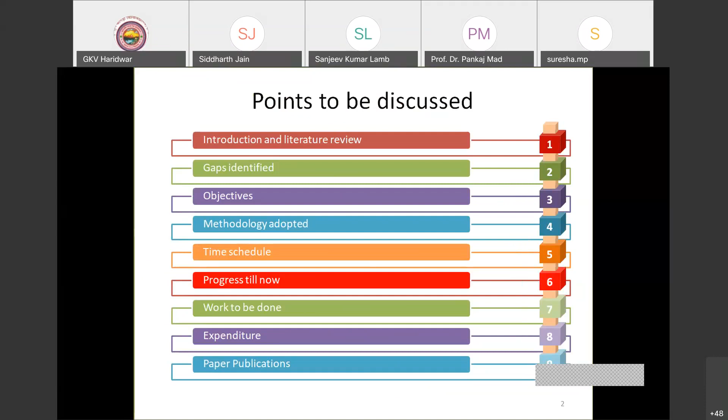So in the few coming slides, I am going to discuss the following points: the introduction, what are the gaps which we identified, objectives, methodology, time schedule of the project, along with the publication details. So I'm just going to discuss why we need alternate fuel, how transport fuel has been changing.

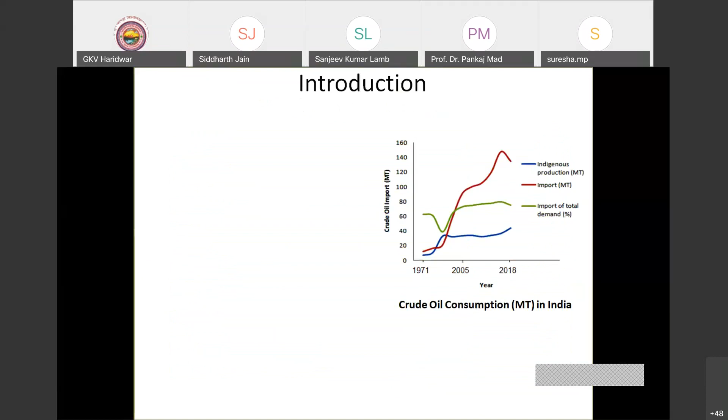So you can see in this slide that India's share of crude oil production is about 1% of the total world crude oil production. However, the consumption share is about 3.1%. So the figure is showing that we are consuming 3 times more than what we are producing. And the result of that is that we are importing almost around 80% of the crude oil from overseas.

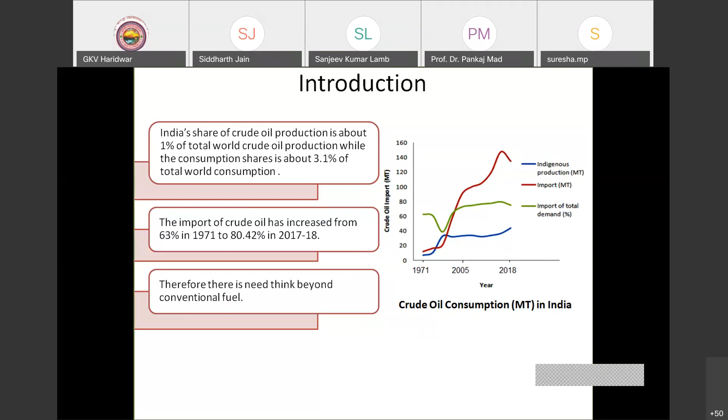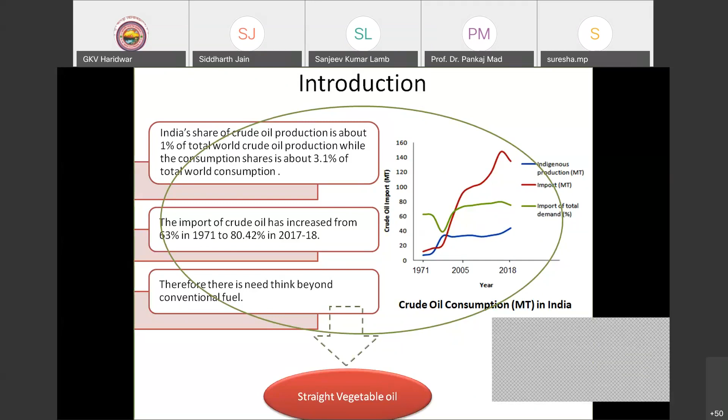So that is why we are spending a lot of money in foreign exchange, as Dr. Pankaj Madan has already discussed. That is the main reason we are moving from conventional transportation fuel to non-conventional transportation fuels, and this is the basis of the need. So for that, we need alternate fuel, and a big portion goes to straight vegetable oil. If we want to produce biodiesel, then straight vegetable oil plays an important role.

Now, before going much into the technical portion, I'm going to discuss what is fuel, and why we are talking so much about fuel, transportation fuel, conventional and non-conventional. So, fuel is any material that can be made to react with other substances so that it releases chemical or nuclear energy as heat, which can further be used.

So basically, the fuel is combined with oxygen. Of course, for burning of fuel, for combustion, we need oxygen. So fuel is combined with oxygen, and in the presence of some initiating heat, it produces a combustion process, and the result is the production of heat as well as exhaust. A part of that heat could be used to continue that combustion process. And the big portion of that heat is used for producing work, for any kind of energy, either mechanical, electrical, any kind of energy.

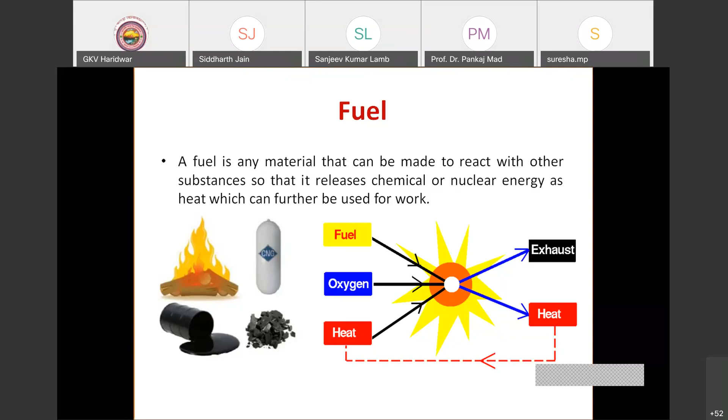So now the classification of fuel. In a major manner, the energy resources are divided into two major parts: the primary energy resources and the secondary energy resources. The primary energy resources are the resources which are naturally available on Earth. These are not man-made. However, the secondary energy resources are synthetic energy resources. These could be derived from primary energy resources, like producer gas or the oil.

So these are not available by themselves on Earth; we have to extract these from the primary energy resources like the coal. Producer gas, of course, is the combination of carbon monoxide and hydrogen, and the oil is produced from the crude oil. So the crude oil, that is the primary energy resource. Now the primary energy resources are divided into two parts: one is the non-renewable energy resources and another is the renewable energy resources.

Of course we know that the non-renewable energy resources are not replenishable in nature. These are not produced by themselves, or they may take millions of years for producing, like the coal, the petroleum, the natural gases. However, the renewable energy resources are replenishable in nature. These are produced by themselves and are abundant on the earth, like wind, geothermal, biomass, solar energy. There are many other renewable energy resources available, but we are just going to discuss here the biomass.

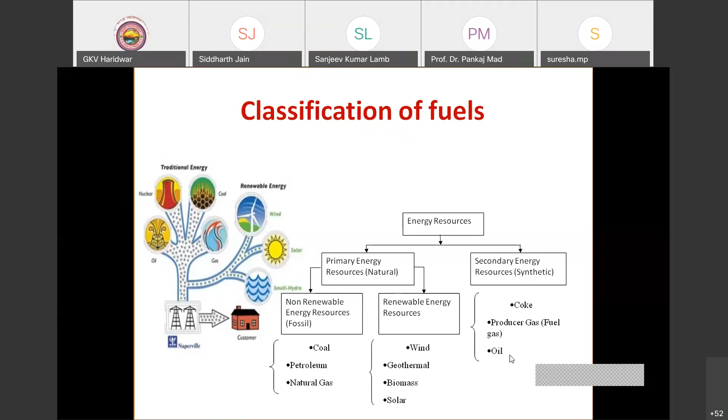So now, what is biomass? Biomass is an organic matter which is produced by plants, both terrestrial and aquatic. Terrestrial means these are grown on earth. However, the aquatic plants are grown inside the water. Both are biomass. In a major manner, biomass consists of three major portions: cellulose, hemicellulose, and lignin. Based on the amount of cellulose, hemicellulose, and lignin, one can decide what technology we need to use for converting that biomass into biofuel or energy.

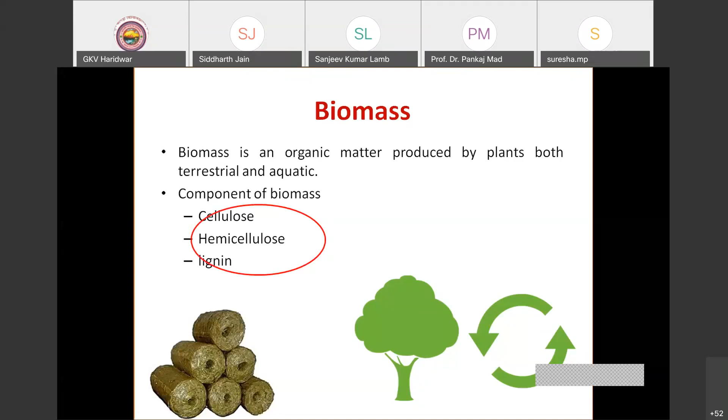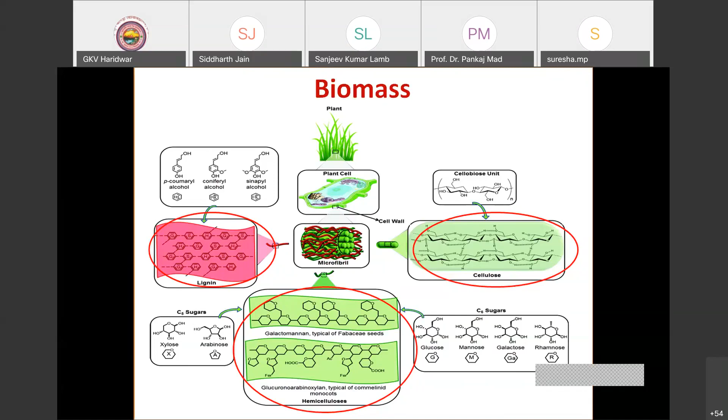So what's happening? In the 19th century, people were producing ethanol and methanol from sugar crops, and these days also countries like Brazil, the US, and Europe have much land, so they are producing energy, the biofuel, from food crops like sugar cane, wheat grass, anything. It is divided into three parts: the oil seed crop, the grains like wheat, and the sugar crop. Based on that, the technology has been divided.

In oil seed, we have fats and oils, which could further be converted into biodiesel using technologies like transesterification or hydrotreating. Hydrotreating can convert that fat or oil into renewable diesel. The grains have a large portion of starch, and the sugar crop has sugar. The starch or sugar could further be converted into ethanol or butanol using conventional alcohol fermentation, enzymatic hydrolysis fermentation, anaerobic digestion, or some modern techniques. After the first generation, there was a big debate in countries like India, Pakistan, Sri Lanka, Bhutan, because we don't have much land.

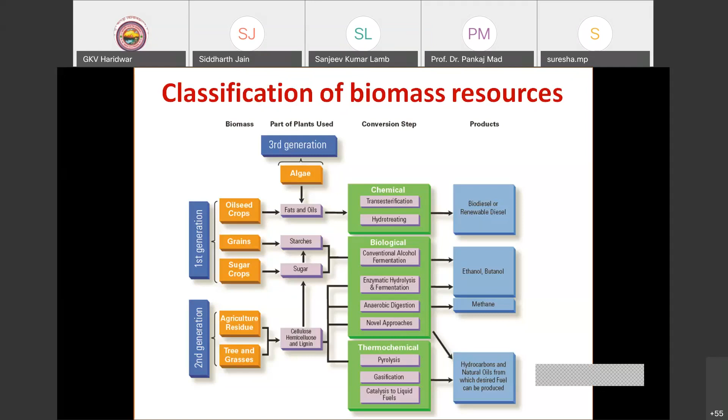So we know what biomass is, and now we know the classification of the biomass. Now, just in 2 or 3 slides, I'll briefly discuss the classification of biofuel conversion technologies. In a major manner, it is divided into 4 parts: direct combustion; thermochemical conversion, which has gasification and pyrolysis; biochemical conversion, which is divided into anaerobic digestion and fermentation; and the last part, chemical conversion. We'll discuss one by one.

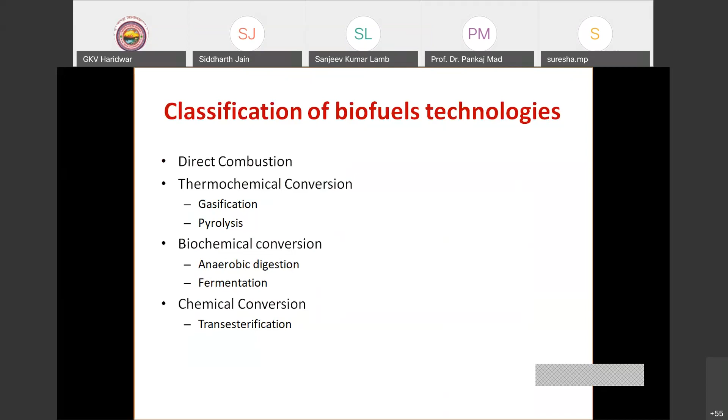Direct combustion - you know very well what direct combustion is. Direct combustion is where we are just having the biomass. It is the most conventional method.

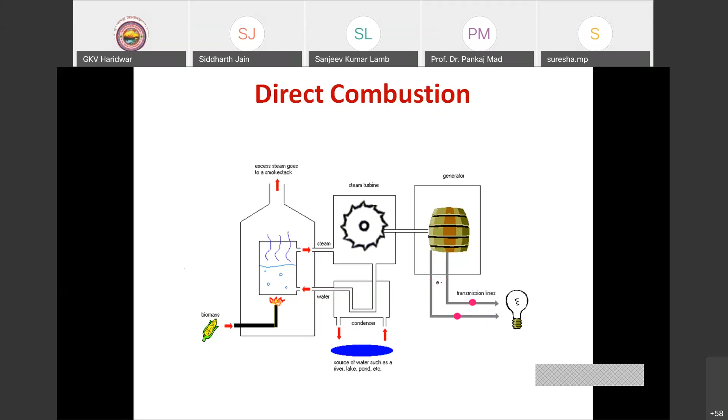Your voice is breaking. The voice is not clear, sir. Is it clear now? Yes sir, now it is clear. Yes sir, please continue.

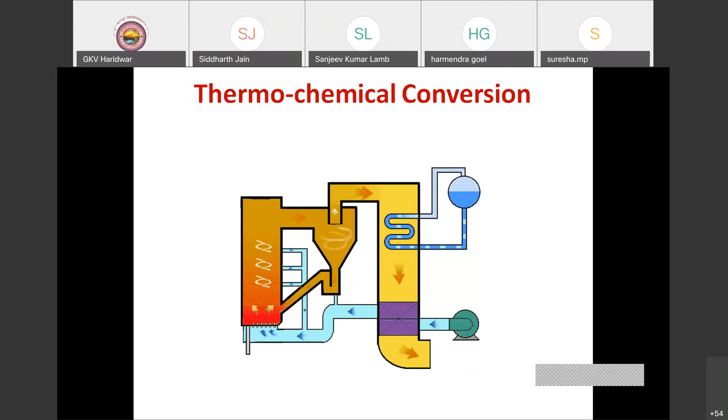Now the biochemical conversion. Of course we know what biochemical is. In the past we have already studied fermentation and anaerobic digestion, meaning biogas. So that is the biochemical conversion in which biomass is being converted. If we are talking about anaerobic digestion, it means digestion without oxygen, anaerobic. So what's happening? The biomass has been converted into methane. Methane is the major and most important gas in anaerobic digestion, which has the calorific value which is of use.

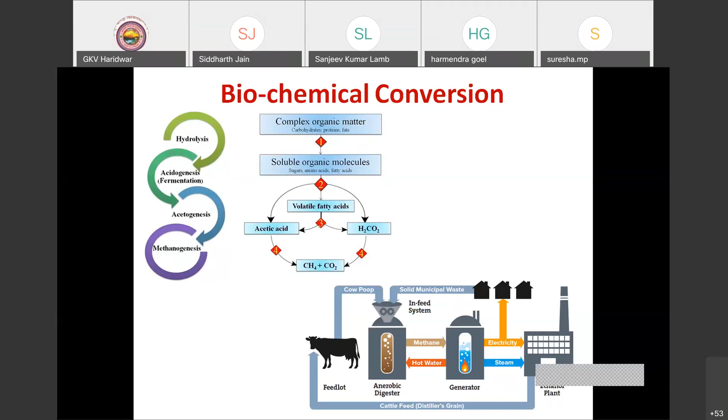So that is part of the biogas. Now the second part was fermentation. So what's happening, with the help of yeasts and bacteria, we are converting biomass into ethanol. So in anaerobic digestion we have anaerobes, archaea, converting biomass into either biogas or methanol or ethanol. So that is the biochemical conversion on which we are going to concentrate during this presentation.

So chemical conversion. What's happening in chemical conversion? Basically, the oil or fat is being combined with some kind of alcohol. It can be methanol, ethanol, butanol, or propanol. It is combined with the alcohol in the presence of a catalyst, producing glycerine and monoalkyl ester. The monoalkyl ester is basically the biodiesel. So this is the process by which we can convert any fat or oil into biodiesel. That is called the chemical conversion.

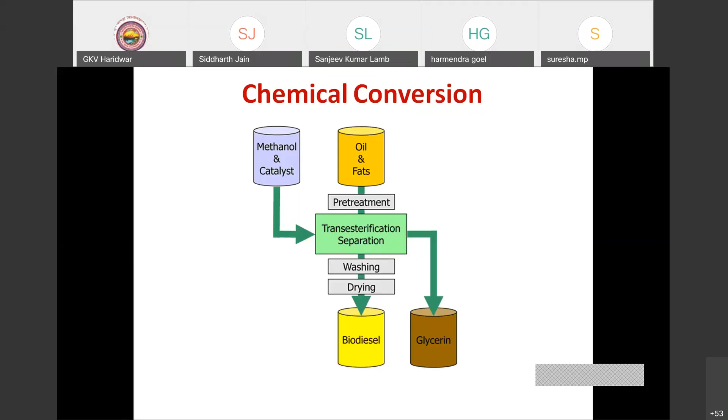We will discuss that in detail, what we are doing and how we are doing it. So now, after these chemical conversion technologies, I am going to concentrate on algal fuel again. So what is algal fuel?

Everybody has the common background that algae belong to a large group of simple photosynthetic organisms. It's a plant simply, nothing else, a photosynthetic organism. It is divided into two subcategories: microalgae and macroalgae, based on cell size, micro size and macro size which is visible.

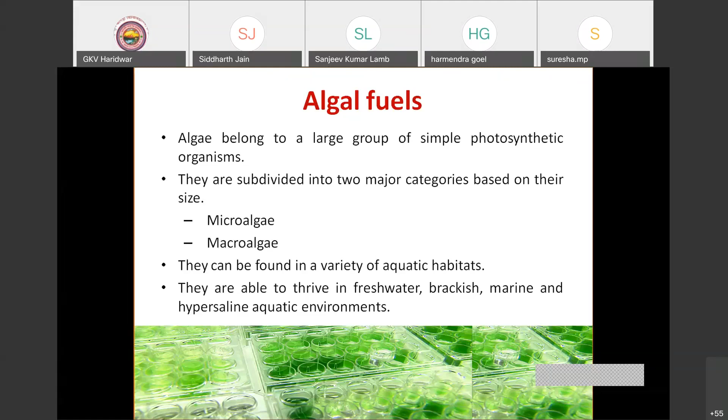They can be found in a variety of aquatic habitats. Of course, we need water, moisture, aquatic conditions for the growth of algae. It can grow in fresh water, brackish water, marine waters, hypersaline aquatic environments. What does it need? It needs nutrients basically, so wherever it can get nutrients, it can grow. And we have huge varieties of algae, so based on the type of water and environment, different kinds of algae can be grown.

Now you can see this reaction, which is the common photosynthetic reaction that every plant does, and algae also do the same thing. What they are doing is fixing atmospheric carbon dioxide in the presence of sunlight and chlorophyll and producing sugar. That sugar is the important part, and they are producing oxygen as well.

This sugar formed by photosynthesis is converted into all types of cellular components like lipids, carbohydrates, and protein. We know that the hemicellulose portion contains the sugar part, and that sugar is converted into lipids, carbohydrates, and protein. The lipid part is the fat part, the greasy part, from which we can produce any kind of energy, like biodiesel. Carbohydrate is the energy portion, everyone knows that, and protein is used for cell growth.

So if we are able to remove or extract the lipid, carbohydrates, and protein separately, then one can go for different applications. Like the protein part can be used for edible purposes. So in my group, what they are doing is extracting the protein, and that would be further converted into the edible portion, the protein powder basically.

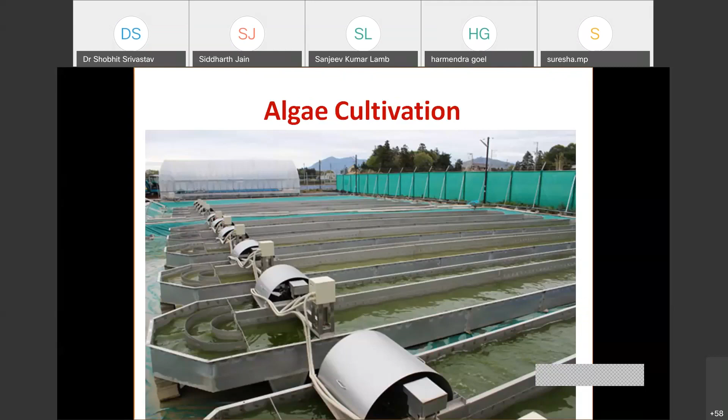Okay, so now you can see this plant, the algae cultivation plant, which is in the southern part of India. They are producing the algae. You can see these kind of big plants can be used for the growth of algae for mass production, in this figure.

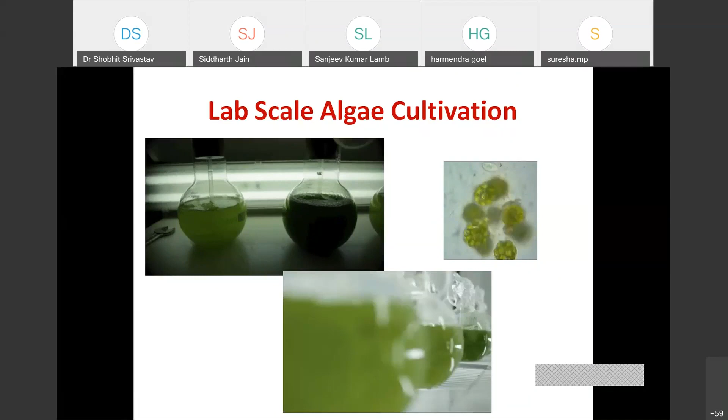So now, based on this, why we are so much concentrating on algae - based on the advantages which algae has. Algae fuel or algae biofuel or algae oil is an alternative to liquid fossil fuel, as we have already reached to that conclusion till now. Algae fuel is an alternative to food crops used for biofuel production. Of course, now we don't need to use the food crops. So that is, of course, very important.

And also, it doesn't need much amount of land because the productivity is very good. We will discuss that too. Another great benefit of algae is that it fixes the atmospheric carbon dioxide, making it nearly carbon neutral fuel. So that is also very important.

And it has over 1 lakh different strains of algae. Some grow better in different climatic conditions, so based on the climatic condition, different regions can grow different types of algae. Like in Uttarakhand, depending upon the temperature and humidity condition, the hydrodictyon, the chlorella vulgaris, and Spirogyra - these three algae are very good for the growth. So we have also used these algae for our work.

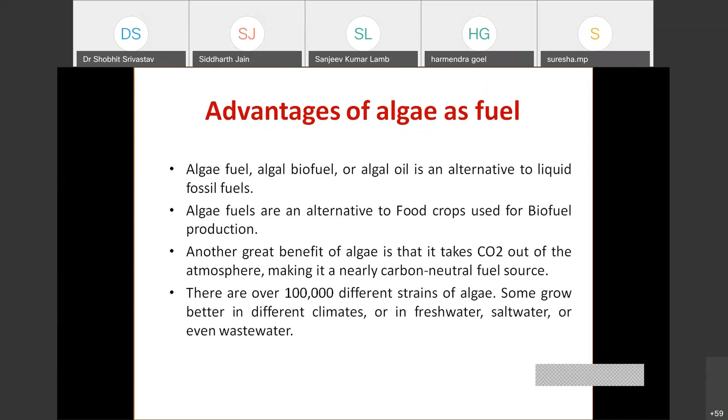Now, what we need actually, if we want to convert algae into fuel - that algae needs sunlight, carbon dioxide from the atmosphere, water, and nutrients. That nutrients part is very important. So, of course, we have also tried that.

We have also seen that the wastewater actually has much of the nutrients, which is of course waste for us. So what we can do is just grow the algae in this wastewater. We can get the nutrients free of cost for the growth of the algae. And of course, carbon dioxide from the environment is free, sunlight is free, and water in India right now has no cost, of course. So that could be used.

These four items can be used for the growth of the microalgae biomass, which could further be converted, based on the constituents inside the biomass, into biodiesel, methanol, ethanol, Fischer-Tropsch fuel, or hydrogen.

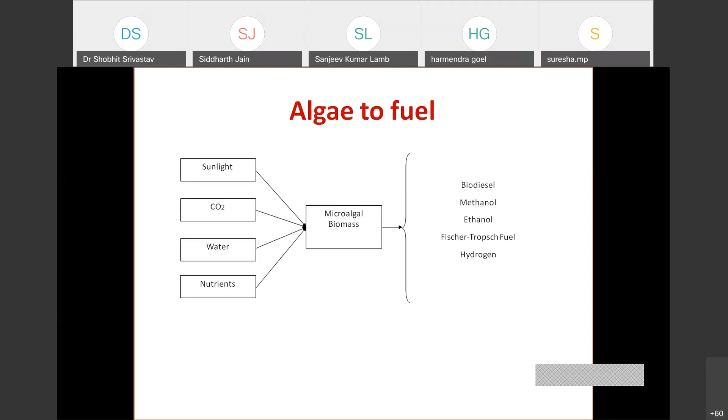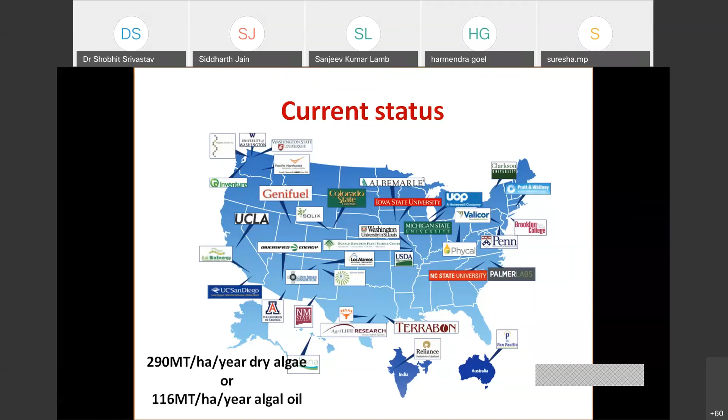Is having the higher viscosity. So if we use these kinds of oil in our engine, then definitely it may create problems because we cannot use high viscosity oil in the engine. Due to that reason, we have to modify that oil.

So there are four common methods for modifying the oil. What are those? Those are blending, microemulsification, cracking, and transesterification.

So what is blending? We just can blend any kind of conventional oil into diesel and then use it in the engine. But again, as the oil has high viscosity, the whole blend has a viscosity which is very high, and that can create problems in the engine filter during combustion. So that is the thing.

Microemulsification is basically the blending of the oil in any kind of alcohol. But as we know, both the oil and the alcohol are not easily mixable, so that creates a problem while using that in the engine.

The third method is cracking. So what is cracking? Cracking is basically the decomposition of that oil in the absence of oxygen, which can further be converted into some low viscosity fuel. But the process needs high temperature and pressure. So that is also of concern, because we don't want to use high temperature, we don't want to use much energy - otherwise, from where will we get that energy? For that energy, we need to burn fuel, so ultimately our purpose will not be solved.

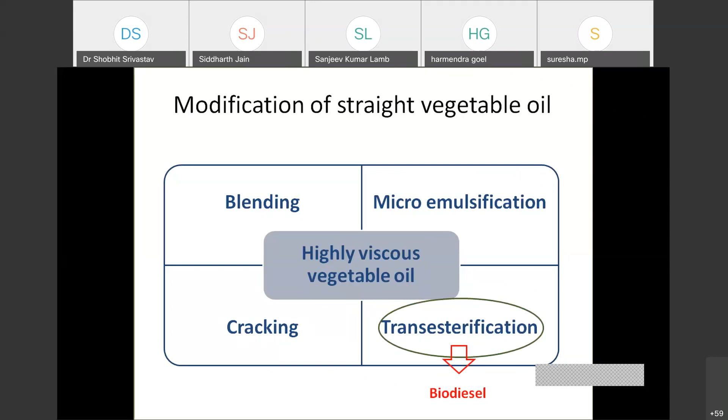So now, in the algae portion, if we want to produce biodiesel from algae, we need to collect the algae from the plant. Then we need to remove the moisture from that algae. Then we extract the oil from that algae. And once we get the oil, we can transesterify that oil, and after transesterification we get the biodiesel after purification. So that is the whole process, and we'll discuss that process.

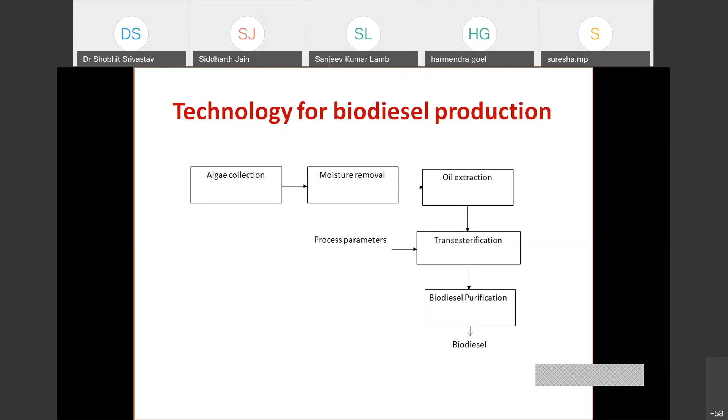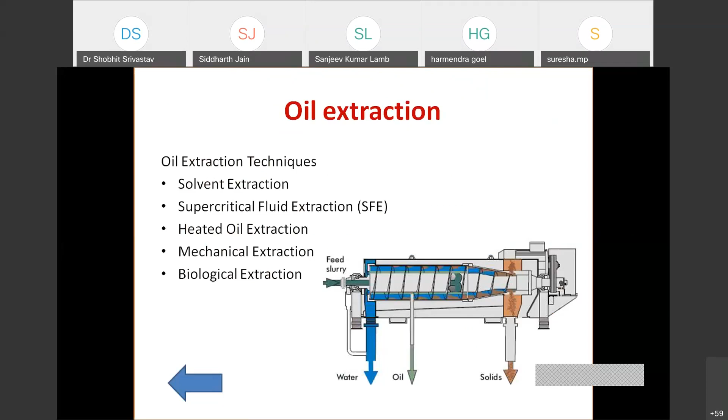It is just like extracting the juice from the fruit. You can squeeze the biomass in the mechanical press and get the oil from any biomass. But that is not very effective in the case of algae. The most effective method for extracting oil from algae is solvent extraction, which we also used in the lab. Once we get the oil, we convert that into biodiesel.

Transesterification is the reaction of the triglyceride, or the oil, with any kind of alcohol in the presence of a catalyst under certain temperature to produce a mixture of fatty acid esters as well as glycerine. The fatty acid ester is the biodiesel, and glycerine is the byproduct in this reaction, but it also has value in the cosmetic industry and the food industry.

So what's happening in transesterification? We are basically combining the oil with the alcohol under certain temperature in the presence of a catalyst, either base or acid, and producing biodiesel and glycerine. So that is transesterification, and the mixture of fatty esters is the biodiesel.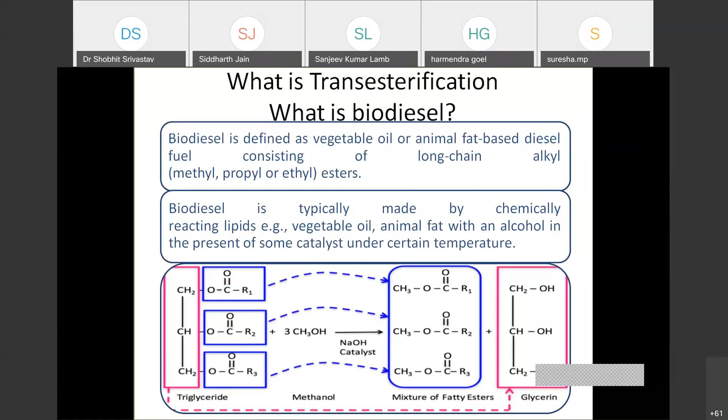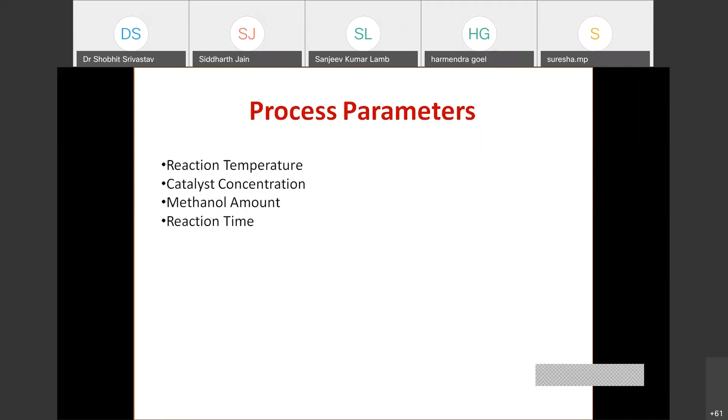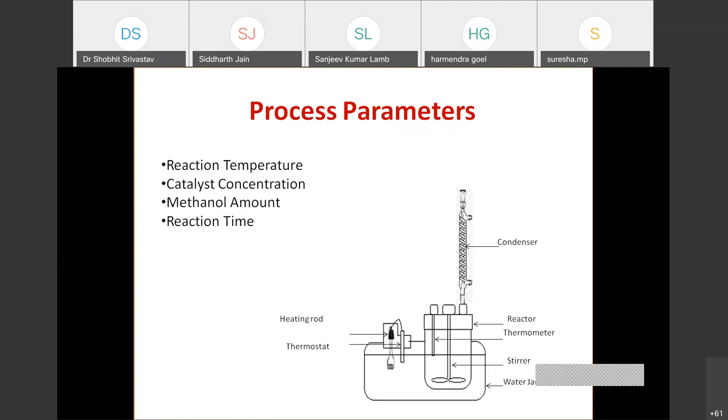The transesterification reaction has 4 major process parameters. Now we know what transesterification is, so what are those? Those are reaction temperature, catalyst concentration, methanol amount, and reaction time. The temperature and catalyst are very important. The alcohol may be methanol, ethanol, butanol, or propanol, and then the reaction time. These are the 4 major parameters, and this is our biodiesel reactor, which we designed in our laboratory. Actually we use many types.

So now, the challenges. What are the challenges in the current technology? This is not new; everybody is producing biodiesel using transesterification of any kind of oil. The challenges are lower biodiesel yield and wastage of oil. If you are producing oil from seed and then converting that oil into biodiesel, there may be some wastage of oil during these different operations, because you are extracting it in a separate flask, separate machine, and then converting it in a separate reactor. So there may be wastage of oil, and the processing cost would be very high.

And the most important parameter is that biodiesel may degrade due to exposure of the oil to atmospheric air. If you extract the oil and place it anywhere before converting it into biodiesel, the double bonds, the unsaturated fatty acids in any kind of oil, may get oxidized and produce higher viscosity compounds. Then it is very difficult to use that oil for production of biodiesel or in any kind of engine.

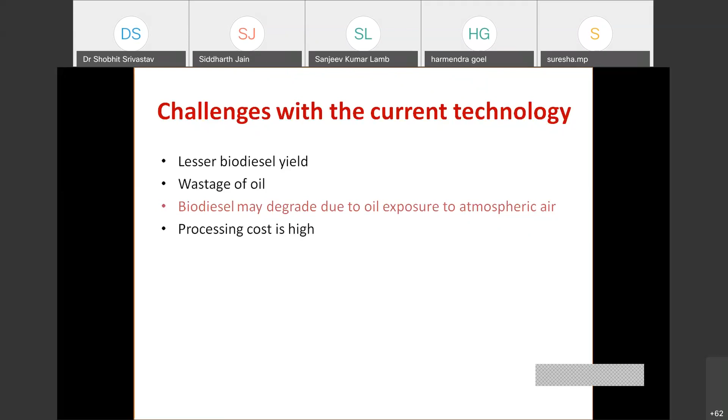That is the main reason why Jatropha oil is not so popular, not so successful in India, because the unsaturated fatty acids are very high and they may deteriorate during exposure to the environment, and it is not possible to create complete vacuum conditions all the time. So what is that? That is called stability.

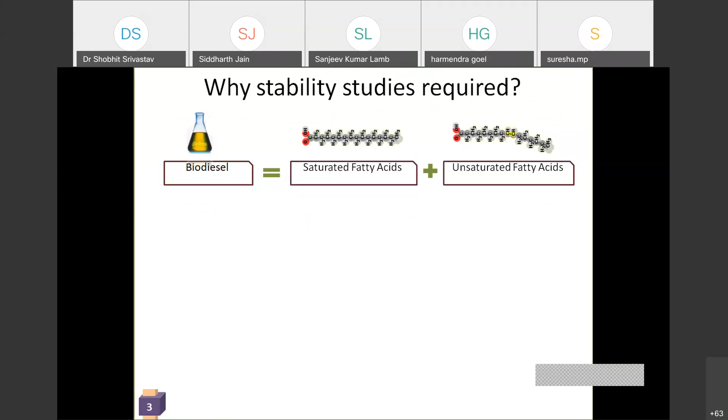The biodiesel is not stable because it is getting oxidized. So what does that mean? Biodiesel has saturated and unsaturated fatty acids, of course. The unsaturated fatty acids go on to form oxidation products after the oxidation reaction. The oxidation products may be aldehydes, alcohols, shorter chain carboxylic acids, insoluble gums, and sediments.

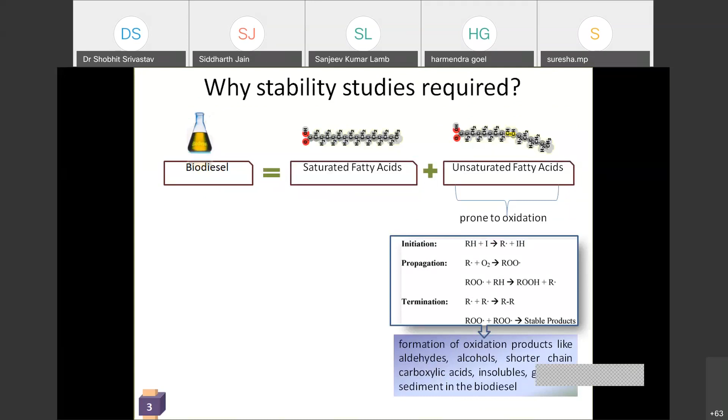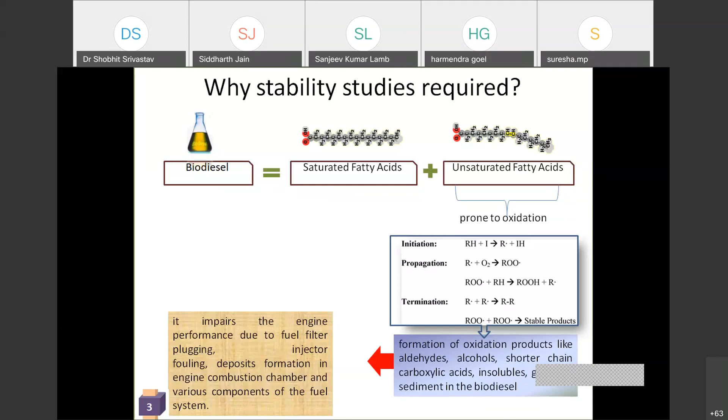This is the basic reason it creates problems in the engine during combustion: fuel filter plugging, injector fouling, deposit formation. These are different kinds of problems due to the exposure of oil or biodiesel to air. Due to this reason, there are methods to increase the stability.

What are those? Of course, we can have some kind of antioxidants. We can use those antioxidants in the biodiesel or oil so that the oxidation reaction can be slowed down. It cannot be completely stopped, but it can be slowed down. The second methodology: we can blend the biodiesel with a highly stabilized liquid. We can do that too.

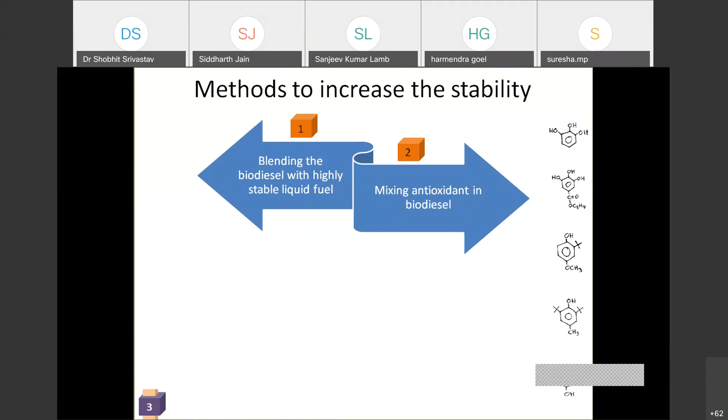There are two different types of antioxidants, natural and synthetic. We are not going much into this. A lot of work has already been done on natural and synthetic antioxidants. But the blending of low stability biodiesel with higher stability biodiesel has not been done. We did a lot of literature review, and found that no report has been found nationally or internationally on the blending or mixing of Jatropha and algae.

Jatropha has high oxidation, meaning it has a high amount of unsaturated fatty acids, and algae has low unsaturated fatty acids. So algae oil stability is very good and Jatropha stability is very poor. We saw in the literature that they had not been mixed by any researcher, so we thought, why don't we mix these two oils for biodiesel? So we added the Jatropha oil and the algae oil in a decided ratio.

Then we found that we got a new kind of oil whose stability is very good, or we can say better than the Jatropha oil. After that, we converted that into biodiesel. So what was the idea? If you are storing oil, don't store it in pure form. You can mix the Jatropha oil and algae oil and then store it before converting it into biodiesel, and after that you can convert it into biodiesel.

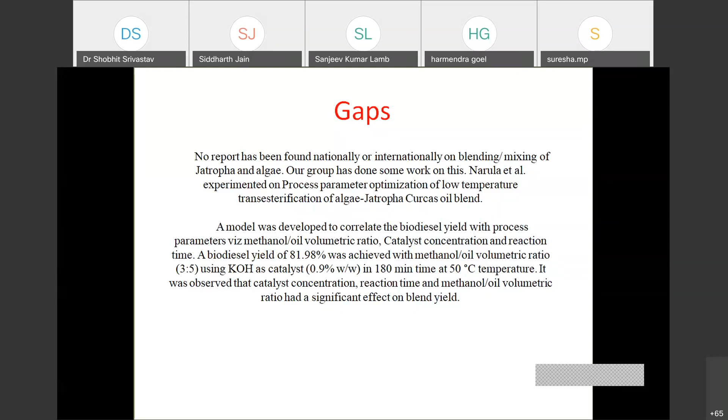But in this condition also, we found that during the transesterification reaction the oil will be in contact with oxygen all the time, so it may deteriorate during the transesterification reaction as well. Of course, we have minimized the oxidation reaction by mixing these two oils, but it is not minimized to the minimum extent.

So the idea was, why don't we mix the algae and Jatropha seeds instead of oils? We can mix these seed powders together and convert that powder directly into biodiesel instead of having the intermediate step of converting seeds into oil and then oil into biodiesel in different reactors. What we are doing now is converting the powdered form into biodiesel directly in one reactor only, so the intermediate step is removed, and it is basically removing the process of oxidation as well.

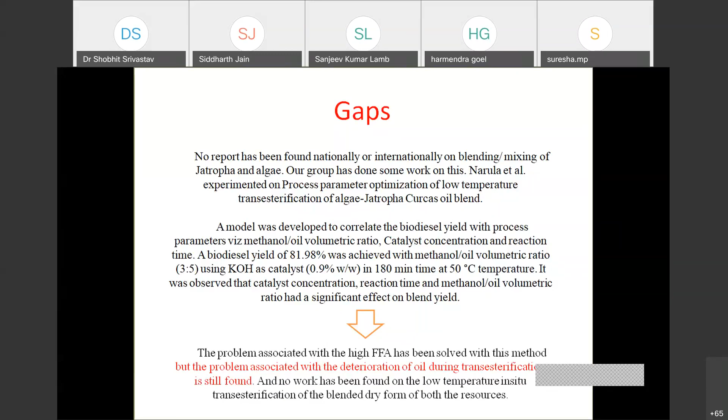We have discussed oxidation, of course. The second thing is the free fatty acids, so we will discuss that also. Based on that, we decided the objectives of the study under the collaborative research scheme. Based on that idea, we decided on the following objectives.

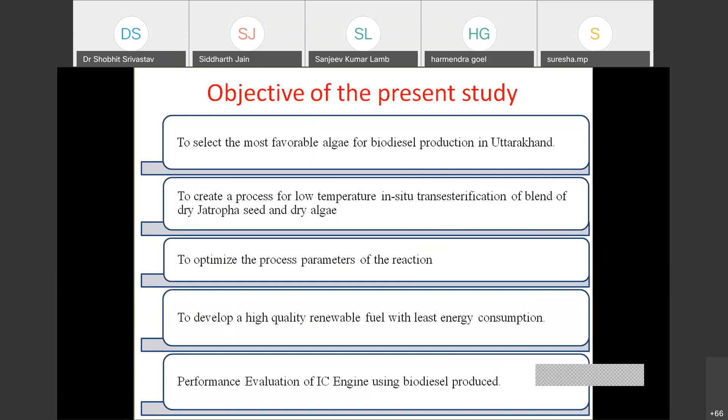So what were those? Of course, to select the most favorable algae for biodiesel production in Uttarakhand. As we are in Uttarakhand, we are doing work for Uttarakhand, and that's why selecting the most favorable algae, and to create the process for low temperature in situ transesterification. We will discuss what is in situ. And to optimize the process parameters, then to develop the high quality renewable fuel, and then the performance of the engine using that renewable fuel.

So based on that, we came to the following methodology. The process is divided into two phases. The whole project was phase 1 and phase 2, both of 6 months. So in phase 1, we collected the feedstock and the chemicals. Then we created our experimental setup. Then we did the experiments. After that we optimized the process parameters, and after that we measured the biodiesel properties.

And after that, having the biodiesel properties, the second phase was mostly concentrated on the experiments of the prepared biodiesel on the engine, to get the engine performance analysis. So that was the whole project.

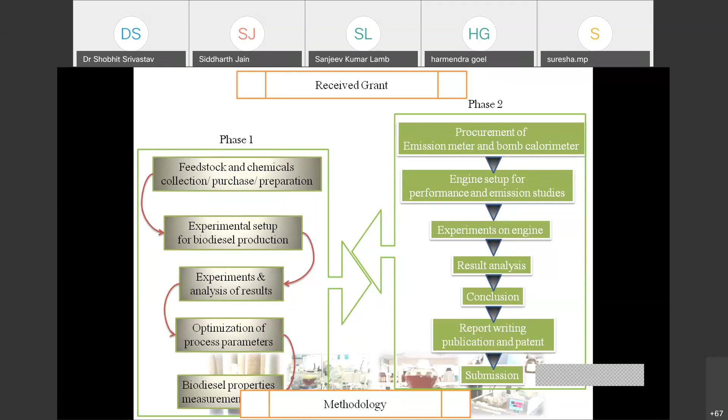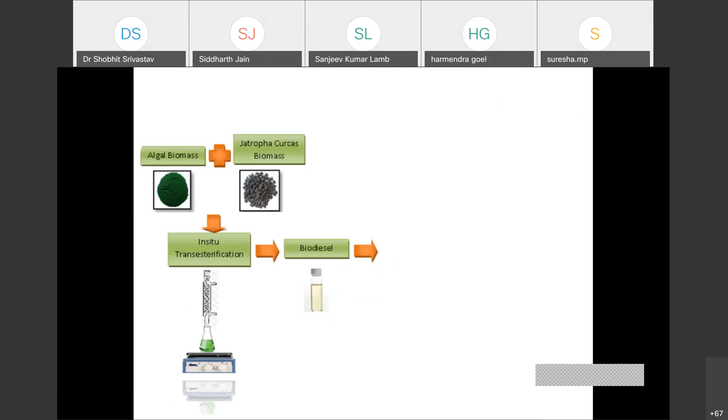So you can see the pictorial presentation in which we took the algal biomass, we mixed that algal biomass with the jatropha biomass, and then this powdered form is converted directly into biodiesel. That direct conversion is called in situ. So we did the in situ transesterification of that biomass and converted that into biodiesel. That biodiesel is being used.

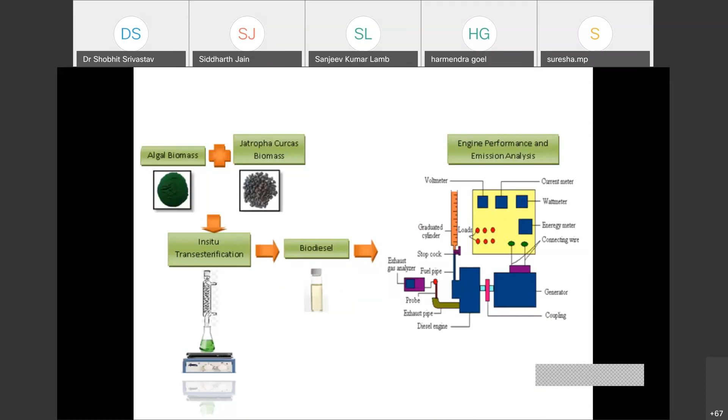Now I just want to discuss what is in situ transesterification. In situ is nothing but direct. So direct or in situ transesterification is a process that blends microalgae biomass plus jatropha powder with an alcohol in the reactor with a proper catalyst that eliminates certain stages like extraction in biofuel production.

So in simple language, in in situ, we are having the microalgae and the jatropha biomass in powdered form. We are mixing it in a pre-decided ratio, and then we are converting that biomass into biodiesel directly without having the oil, in a single reactor. So that is in situ. So the oxidation part of the reaction is removed now.

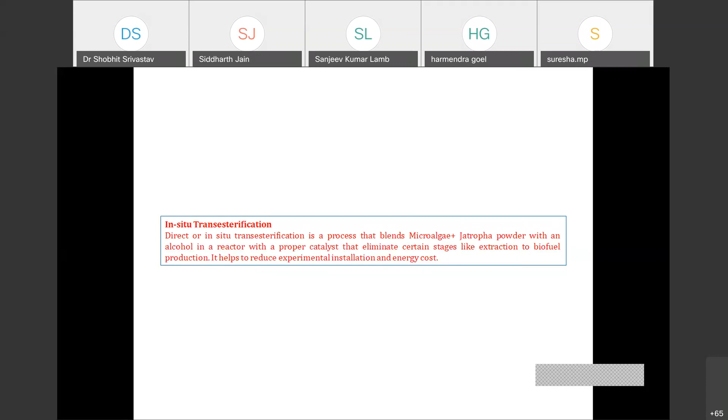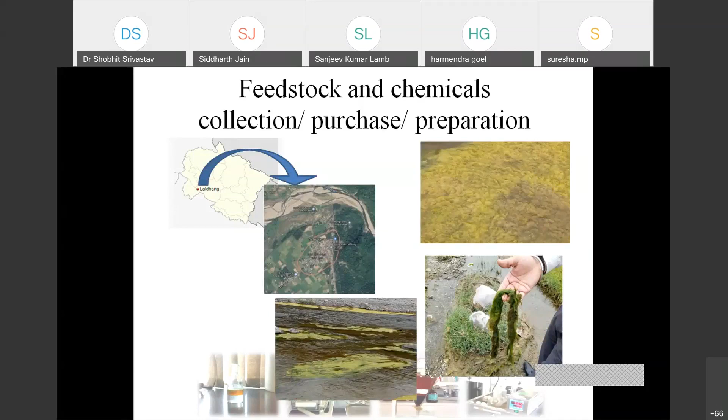So we have collected the feedstock from the Laldhang. It is a site in Uttarakhand, near Bijnor. So from here we collected the Spirogyra algae. Our team of students collected this. Then this algae is dried and then powdered, and you can see the figure.

So the free fatty acids of this biomass are 0.5%. Saturated and unsaturated fatty acids are 72.1 and 27.9%. We mixed that with the jatropha seed powder, whose free fatty acids are 22%, saturated is 26%, unsaturated is 73%. So you can see the unsaturated part of the jatropha is very high.

That's why it is mixed with the saturated portion of the algae, so that the mixture has, of course, saturated 60.3%. So now the oxidation problem is mostly removed. It has 39.7% unsaturated fatty acid, which is much lower than the unsaturated portion of the jatropha. So that is the powdered form, and this powdered form is used in this reactor.

And you can see the schematic as well as the photograph of the reactor. It is a round bottom flask having 4 necks. So we mix that mixture with the alcohol, which is methanol, and the catalyst, and the temperature of the reaction was 50 degrees centigrade. Then we optimized these process parameters. We used a range of parameters, and we discuss that range.

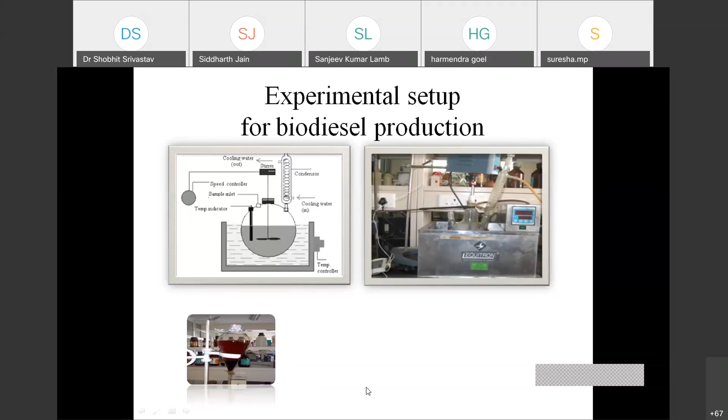Yeah. So this is our separating funnel by which we can separate the biodiesel, which is the upper portion. Then after having the biodiesel, we can separate the unreacted methanol. During the reaction, a part of the methanol remains unreacted. This unreacted portion of the methanol can be removed by boiling that portion.

And after that we can wash the already prepared biodiesel in water, so that the catalyst mixes in the water, and we can get catalyst-free biodiesel.

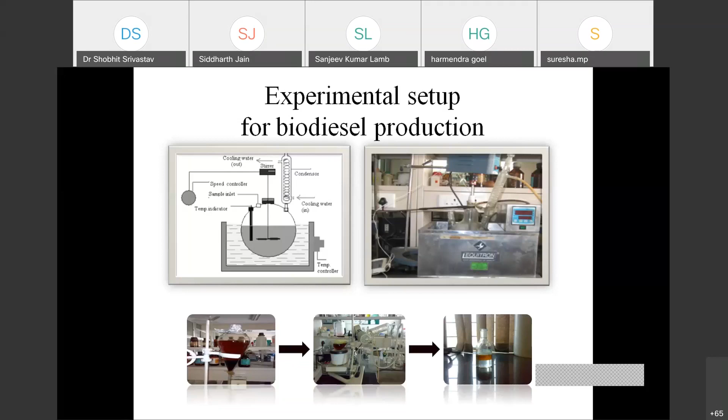So this is the engine which we used in our experiments, schematic as well as photograph. This is the 2 kilowatt engine. We used the MRU exhaust gas analyzer for getting the gases.

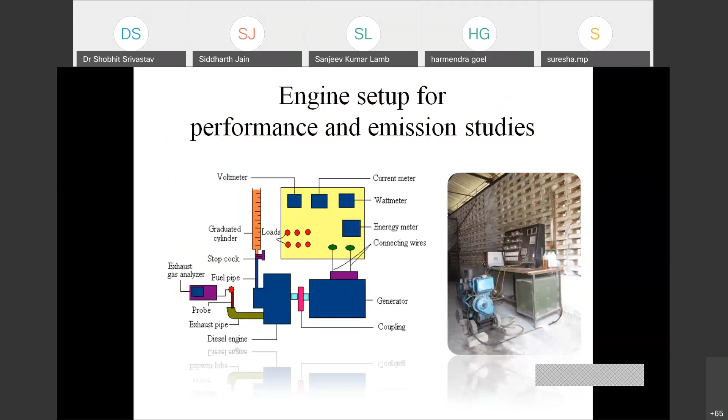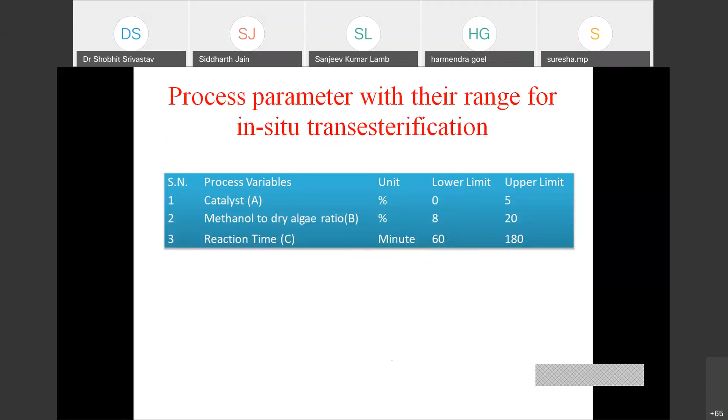So these are basically the parameters with their range in the in situ transesterification. Catalyst concentration is 0 to 5% we took, and the methanol to dry algae ratio is 8 to 20. Reaction time is 60 to 180, and the temperature of the reaction is 50 degrees centigrade. So we designed our experiments using the response surface methodology.

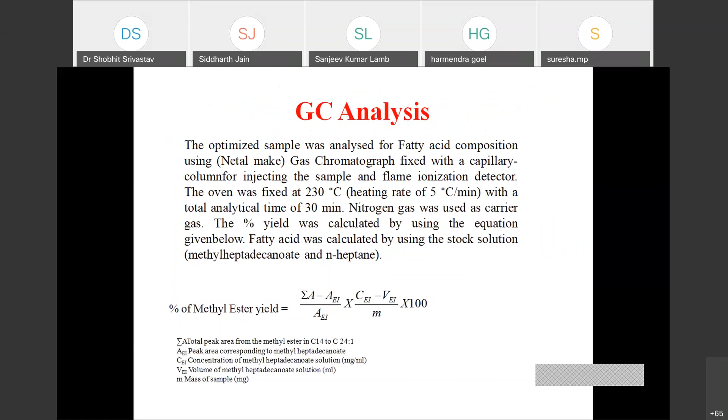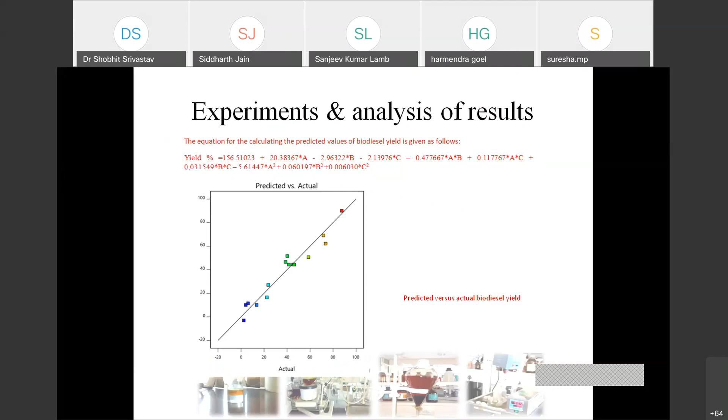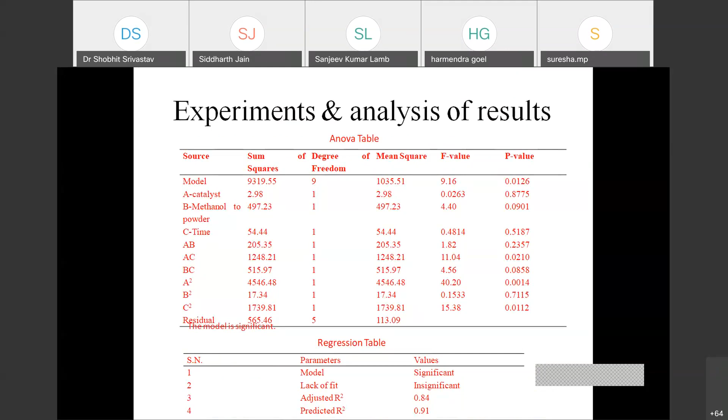This table is showing the analysis of variance, which shows that the model is significant. However, lack of fit, meaning the error part, is insignificant, along with good values of adjusted and predicted R square, which is the regression coefficient.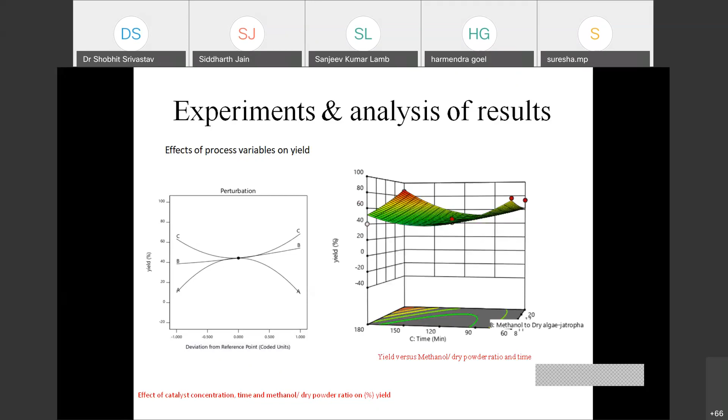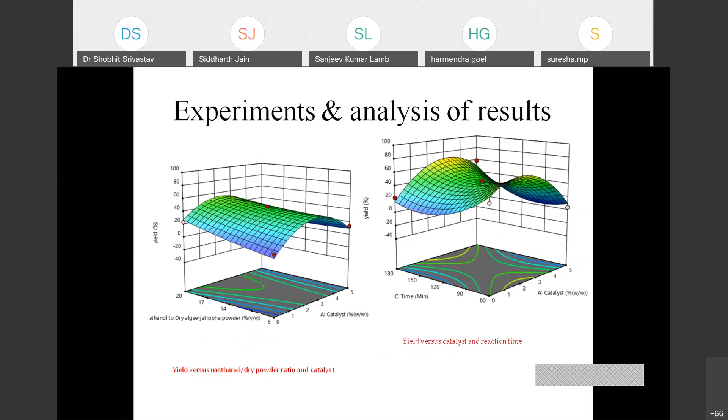The same thing could be seen in the response surfaces. These are the response surfaces showing the relationship between the yield and the catalyst and the methanol amount, as well as yield with the catalyst and the time. Based on that, we optimized using the design of experiment, and it is found that the maximum yield is 88.5%. When we were using the oil, it was 81%. And now using in situ transesterification in powder form, we are getting 88.5% biodiesel yield.

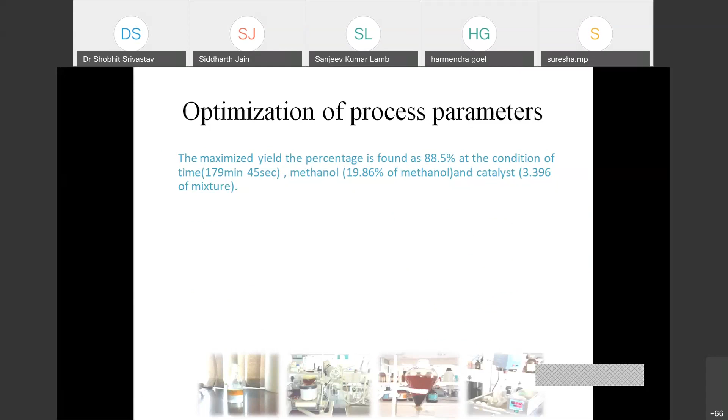The optimized conditions of the parameters are 179 minutes reaction time, methanol amount around 20%, and catalyst amount around 3.5%. We also measured the biodiesel properties like the flash point, viscosity, water and sediment, and the acid value, which are in limit according to IS 15607.

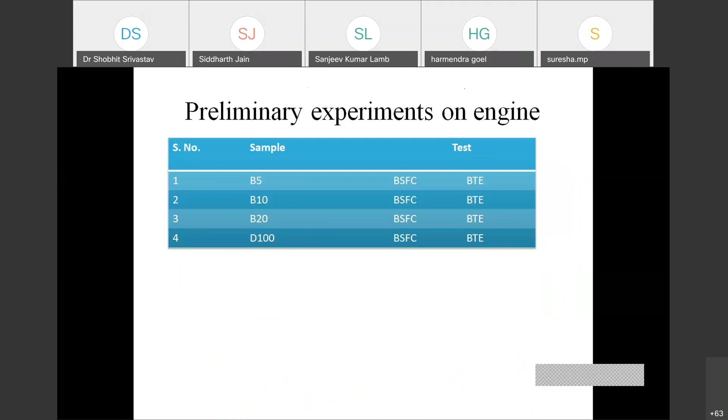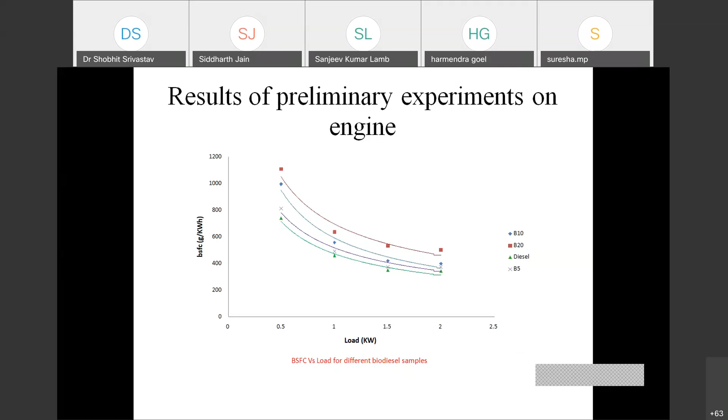You can see that the brake specific fuel consumption of diesel is minimum. As the amount of biodiesel in the blend increases, the brake specific fuel consumption gets increased, because of the lower calorific value of the biodiesel. This shows that up to the B20 blend we can use that biodiesel in our existing engines, and based on that we have also published one patent on that dry mixture.

Basically, we have done the in situ transesterification of the mixture of algae and jatropha in a pre-decided ratio, so that the yield is very good. It requires less reaction temperature as well as less reaction time. Based on that, we published one patent on the biodiesel composition and a method of preparation thereof in the Indian Patent Journal in December 2019. So that is all about this project.